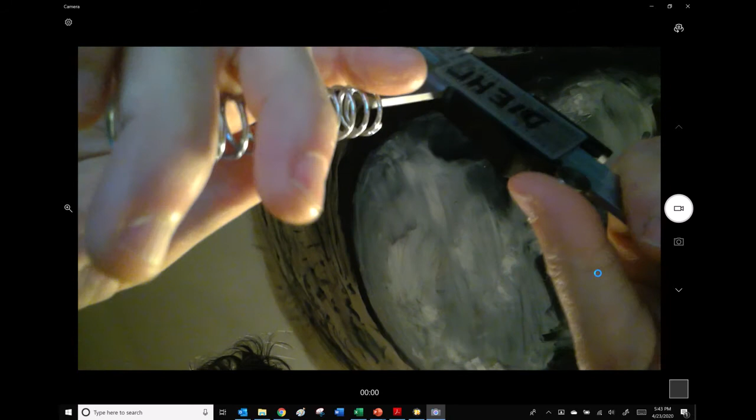We will, let's see, you got to be really careful when you measure the coils, right? That's 1.57 right there, thereabouts. But I measured it a couple different places, or just do it right, really close in there. And I think I also measured it this way, right here. So it's kind of hard when you get it in the curvature there to decide what the wire diameter is.

All right, so I'm getting somewhere in the neighborhood of, there you go, that's actually 1.63. Yeah, so okay, so now I can get that to be 1.45. It's hard to get 1.47, and I just, my thumb moved just a little bit. And then I can also get the...

So let's try to get the diameter of this, right? It's hard to get the diameter straight on, but you see I get like 17.13. Of course, I think it's reversed right now because of the camera. And then the length of this thing came out to be somewhere thereabout 77 or so. So maybe you believe me now, I don't know.

I could also have looked this up, done this in metric here. I mean, done this in US units right there. So there you go. The important part here is that we have some dimensions off of a real spring, and we want to try to find some stuff out about it. That'd be kind of cool.

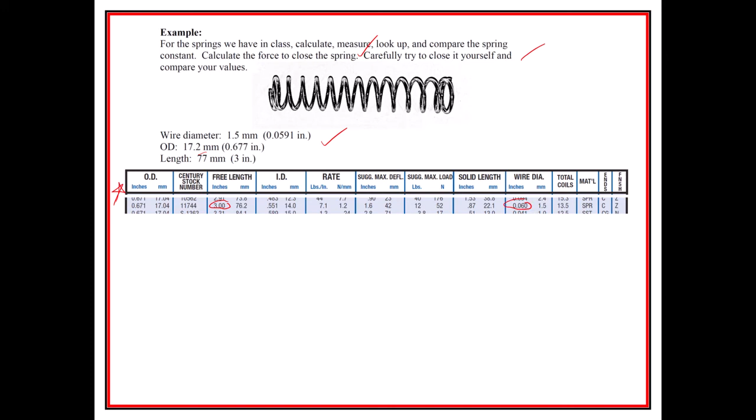I did look this up so we can compare the results that we calculate from this to what's found in this catalog. And I took a look and I found an outside diameter of close to 17 right there, right? So I had 17.2, and maybe I think, well, that might be a good guy. And then I noticed it was free length, that's cool. And then I also know his wire diameter. And I counted the number of coils.

So here is actually, this right above is a picture of the coils. So I will, because it ends right here, I'm going to count, that's going to be 1, 2, 3, you got to be careful, 4, 5, 6, 7, 8, 9, 10, 11, 12, 13 right there. Oops.

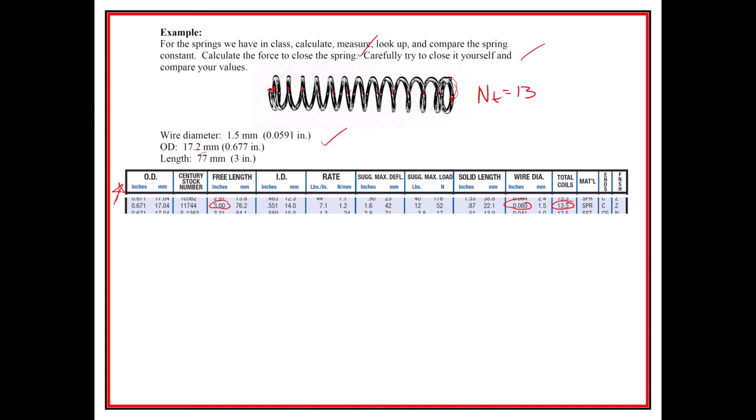And then this guy doesn't quite make it back over to there, right? So when I see 13 and a half, I kind of believe it. I think 13 and a half might do it. I decided when I calculated these that the total number of coils, the numbers I used, 13, right? So we could have also used 13.5. And I also noticed that these ends are closed, right? So I decided this was a closed situation, and so the number of end coils was 2. Therefore, I said the number of active coils was 11 coils. That's often the first thing that we'll do.

I'm going to use US units, even though I could use metric as well. So here's the diameter of the wire, here's the outside diameter, and here's the length.

One of the first things I'll do is take the mean diameter by taking the outside diameter and subtracting out the wire diameter, or 0.618.

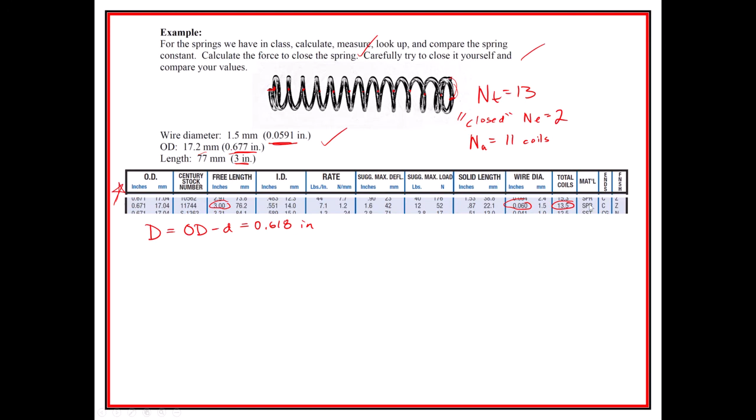Right, I'm going to need some material properties for this. So I go back over to here, and when I pick this out right here, you'll notice it says SPR is material. If I come back up here, SPR is spring steel. So what did I use? It looks like I might have used music wire, maybe. Yeah, sure enough, I did. So I just decided that's what I'm going to use.

Why did I do it? I'm not even quite sure, to tell you the truth. But that's my exponent, and this is my A.

I also used music wire, and because this dimension is 0.059, 0.05, it's going to be in this range, I used a G of 11.85, and that's going to be M PSI. And then I also used music wire here, so I used 45.

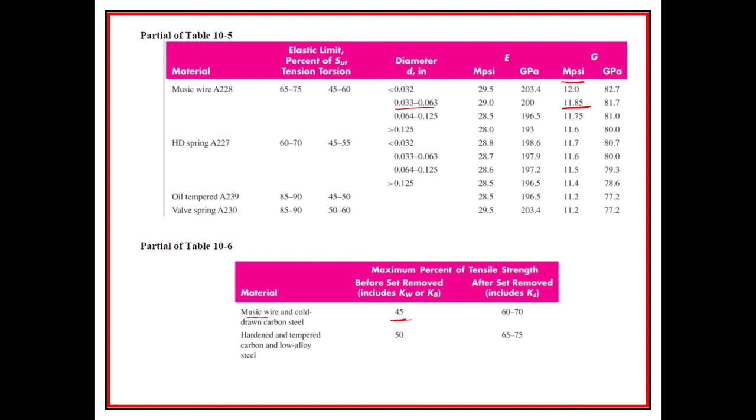So these are some of the material properties that I decided to use, but the one I care about first is going to be my G, 11.85 M PSI. I think I might have backed into some of these in making that decision.

So let's see, I think I have all the information I need to get my all-important k. We take the wire diameter to the fourth times the modulus of rigidity, divided by 8, divided by the big mean diameter cubed, and then number of active coils.

And I got 0.0591 to the fourth, 11.85 E6, divided by 8, big diameter is 0.618, the mean, and then I went to 11. And I found this to be 6.964 pounds per inch. And we want to compare that to, drum roll please, we got 7.1 pounds per inch.

Right? So we're in the ballpark there. We made a couple decisions. This was a decision, we decided 11 instead of 11.5. There's some variation that we could have as part of this.

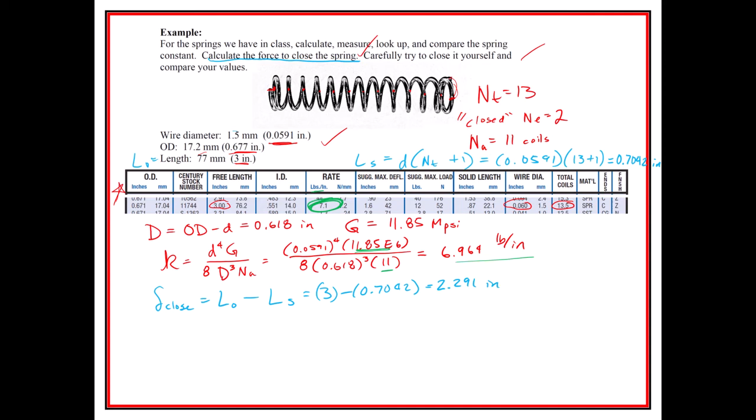And did I find that value? I did, 2.291 inches. That means that we have to press, that's how much deflection it's going to take.

And we could actually check this, let's keep it this time, we could actually check it with this, right? We got to be careful that it doesn't go flying. And I probably need a friend or somebody to come over here to measure what that is. But that could be 3/4 of an inch. Sure, I'll buy that.

And that's what we set up here. The solid length was 0.7.

So moving on, we can now find what the force to close is going to be equal to the K times the delta to close. And so that's going to be our 6.964 times our 2.291, and what we're left with is a force to close of.

15.95 pounds. So I had to use, my fingers had to press 16 pounds basically to get this thing to close. Now let's look at the maximum suggested load they have up here is 12. So they don't want you to go to its solid length.

The solid length is predicted to be a little bit smaller than what they're saying, and a lot of that has to do with the number of coils. They're saying the ends are closed. It could just be the variation in the way I measured things, or it could just be the batch - not everything is exactly the same coming out of the factory. These are cheap springs, I bought like 4 of them in a pack for less than a couple bucks, maybe not even $1. So you're not going to get really good repeatability here.

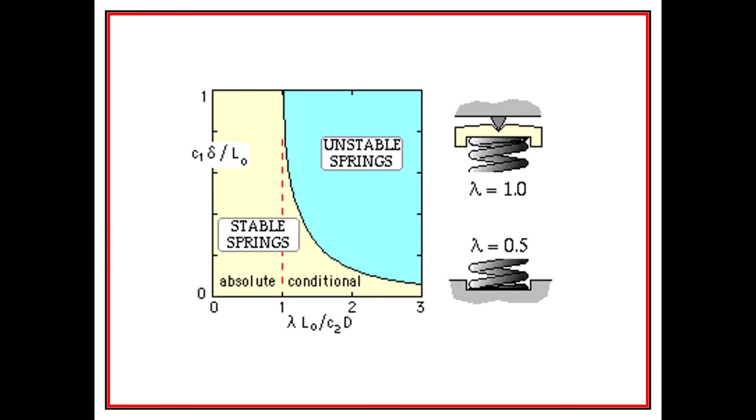Let's see - carefully close. Just check this value yourself. But I also have another one here. I'm going to estimate the safety factor at closure for the sample spring.

Let's continue with this problem - we're going to need the stress and the strength. For the stress, we need to find the Bergstrasser factor, and to do that we need the spring index. So that's 0.618 divided by 0.0591, and we get 10.46 as our index.

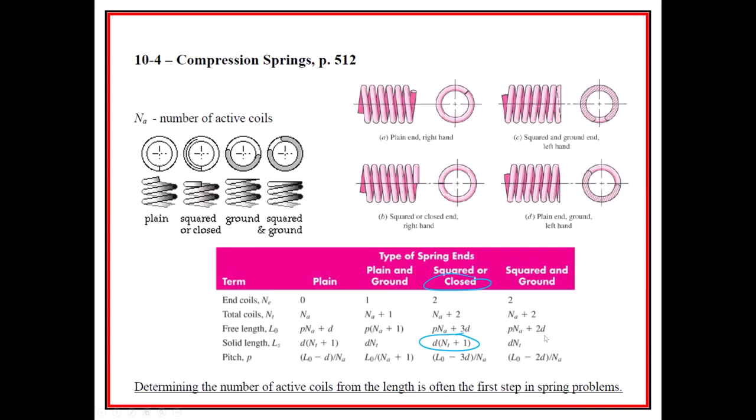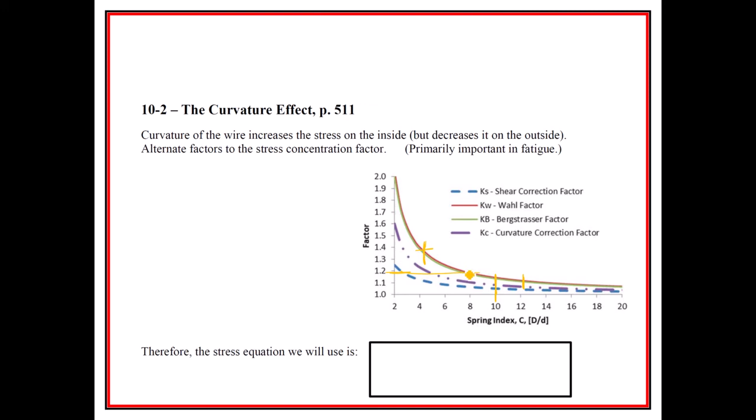The Bergstrasser factor is 4C plus 2 over 4C minus 3. By the way, the index is usually somewhere between 4 and 12, so we're on the high side. If we plug C in there, we get 1.129, which is a pretty low number - we'd expect it to be something greater than 1. Looking at that comparison page, we're up there so we expect it to be low - we don't expect that number to be much greater than 1.4, and here it's somewhere between 1.1 and 1.2, so that's to be expected.

Now we want to get the stress of the thing. Tau is going to be Bergstrasser times 8 times F times D over pi D cubed. So we get 1.129, then 8, then 15.95 for the force, the diameter is 0.618, and pi is delicious, and 0.0591. What we end up with is 137.3 KSI - that's a lot. Oh wait, that needs to be cubed. I knew there was going to be something I was missing.

Now let's figure out what the strength is. The ultimate strength we can get from A divided by the wire diameter raised to the exponent M. I said previously that we were going to use 201 and 0.145. So we go 201 divided by 0.0591 to the 0.145, making sure we're using the right units, and I believe what I end up getting is 300 - interesting, like a nice even number.